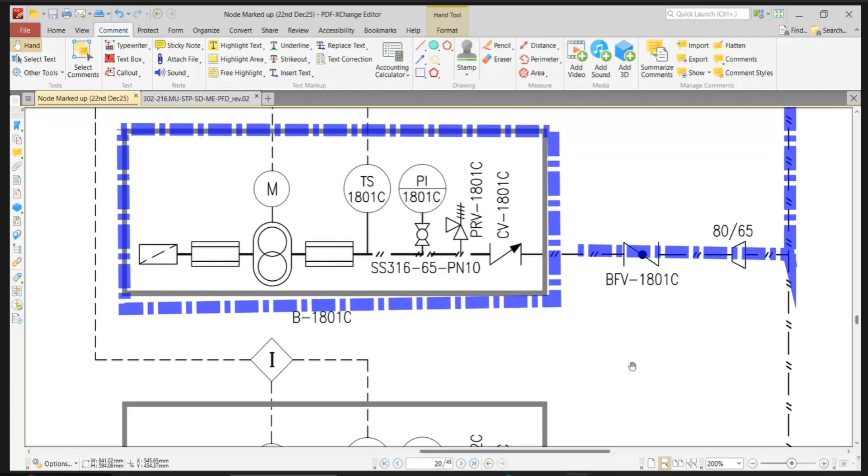Box? Okay. What about filter? Non-flow. Filter must be inside the compartment. Inside the compartment, right?

Okay. So guys, hang on a second, Chairman. I wanted to clear questions about the control philosophy. What do you mean by your recommendations include a control philosophy? What are you saying? They haven't provided a control philosophy, or what is it?

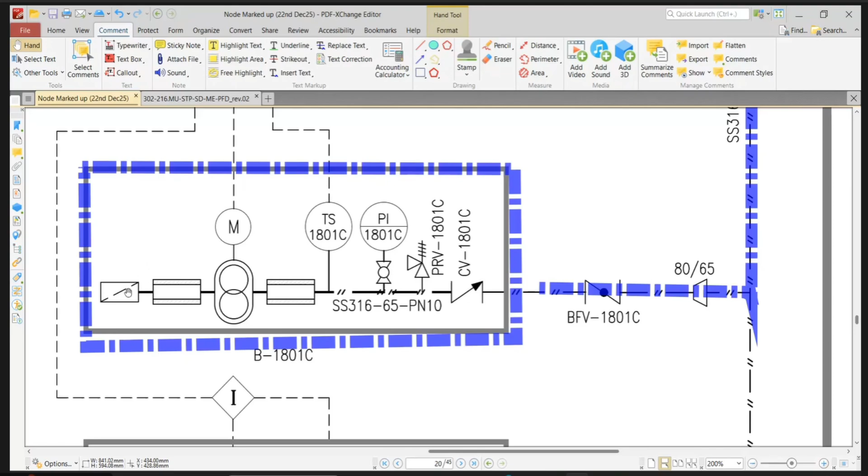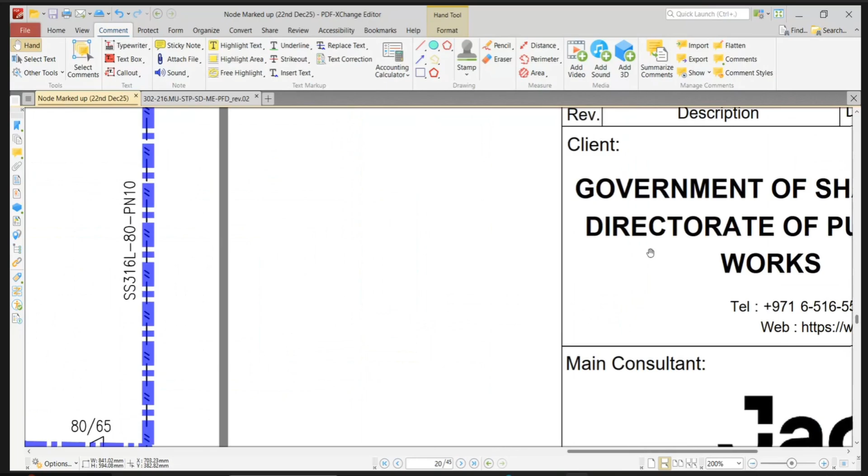Okay, I see. But that's not acceptable because the control philosophy should include the supplier's input. Yeah. That is why. You go to point number 2, for example, for the process area blowers, we just put a note. No. He asked about the control philosophy. So we have already submitted the control philosophy.

What's coming back? So we mentioned the functionality of the blowers, for example, for the process area blower, the aeration tank, how it will work. We mentioned that we have DO sensors for the dissolved oxygen, and we have VFD. It will control to keep the oxygen within 2 or 3. So all these points are mentioned in the control philosophy. In the P&ID, we just put some highlight points.

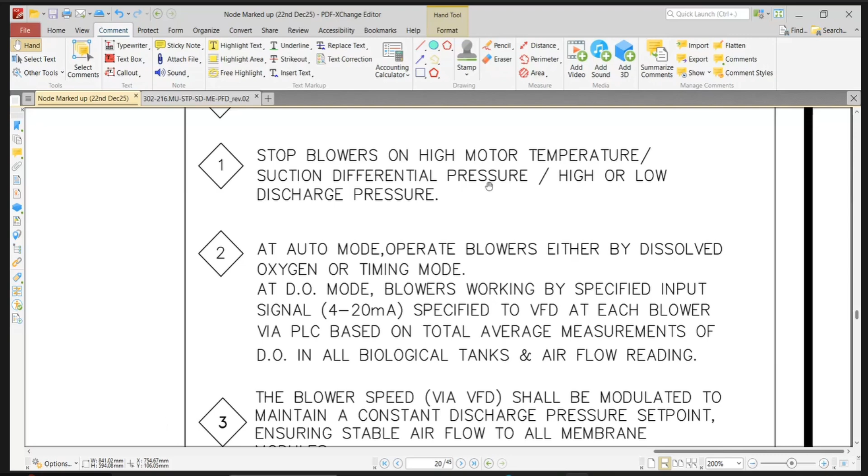That's it. As you can see now, like example number 2. This is related to the process area blowers. You also have some points. Like number 1, you will see in the control diagram what will happen. You have a temperature switch. In case the temperature switch goes high, it will immediately shut down the blower for protection.

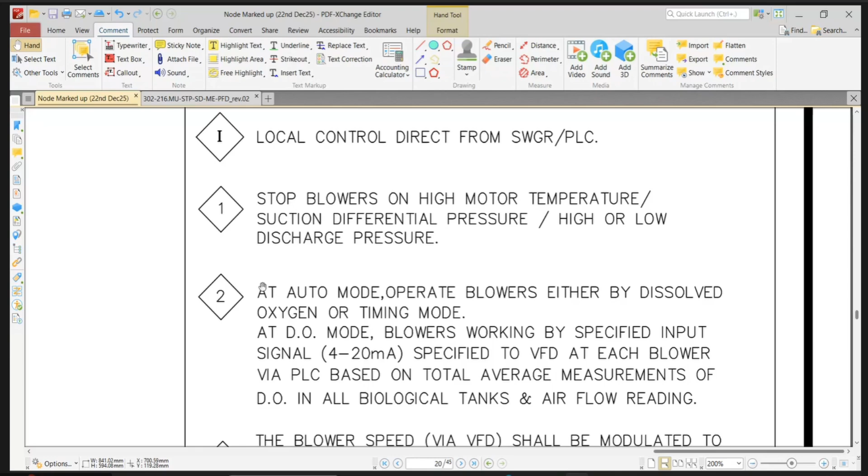Yeah. Okay, guys. So. Yeah, डाल दिया देखो ना.

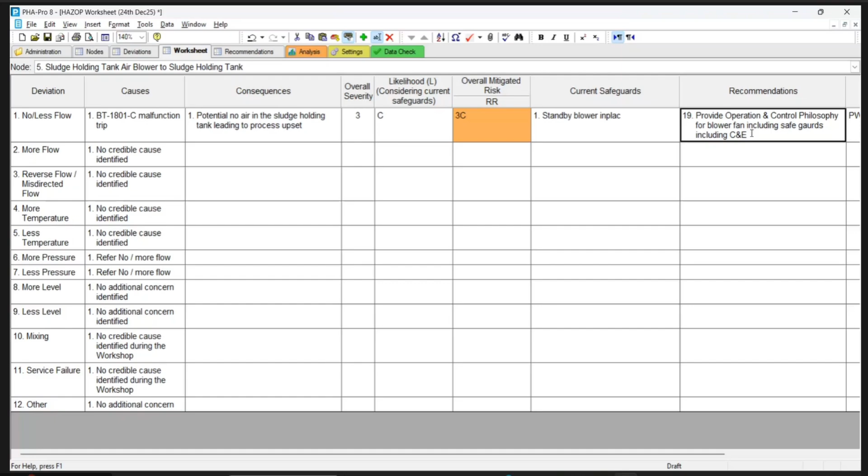No. Cause and effect. Okay, you can put the complete one. Cause and effect and then bracket C and E.